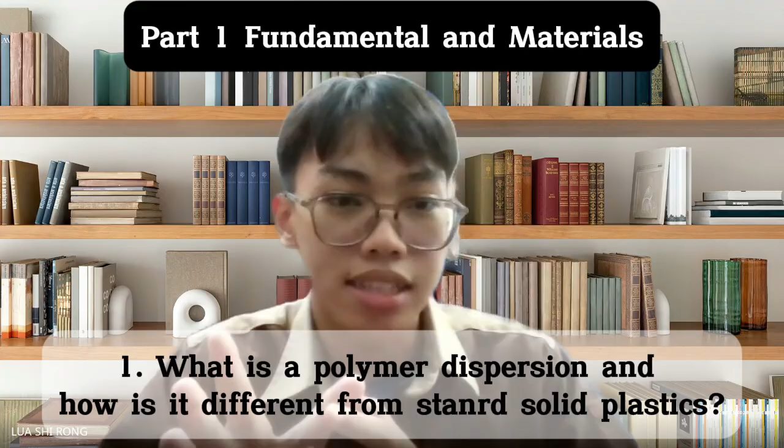So now we're going to begin with the first part of the questions, fundamentals and materials. First, what is a polymer dispersion and how is it different from standard solid plastics? And second, how do you ensure that the raw materials from your suppliers are always of consistent quality?

Okay, part one, fundamentals and materials. We talk about polymer dispersion and conventional plastics. Conventional plastic is normally more robust and harder compared to polymer dispersion. Polymer dispersion is normally in liquid form. I'm not an expert on conventional plastic because I'm not in that industry, but chemistry-wise it's similar. The main raw materials for both conventional plastic and polymer dispersions are monomers.

The only thing is they make polymer dispersion as a liquid, and conventional plastic into pellet forms, bits and pellets. Polymer dispersion's main end users are in coatings: coatings for the paint industry and construction, your cement work, your sealant, and also adhesives like bonding agents. These use polymer dispersions, and also some very soft plastic linings.

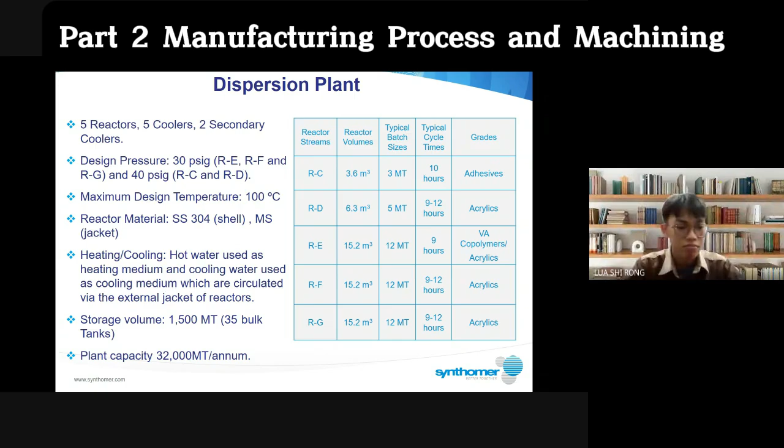So this process plant, polymer dispersion Kluang, we have 5 reactors. You can see here, okay, 5 reactors. Reactors is the main equipment to polymerize the polymer dispersion. We call them reactors. And the other 5 coolers and 2 secondary coolers are supporting tanks for the reactors. That means when you end the process in the reactor, you transfer to cooler to cool down, and add in some other raw materials before we can filter and move to storage.

Okay, these 5 reactors, we call them with alphabets from C to G. So you can see RE is reactor E, RF is reactor F. And here is reactor G, this is reactor C, and reactor D. So it's from C to G. Why C to G is because we used to have A and B, a very small reactor at a different location in Kluang, but there's no more. It's already decommissioned. So that's why the remaining is C to G, 5 reactors.

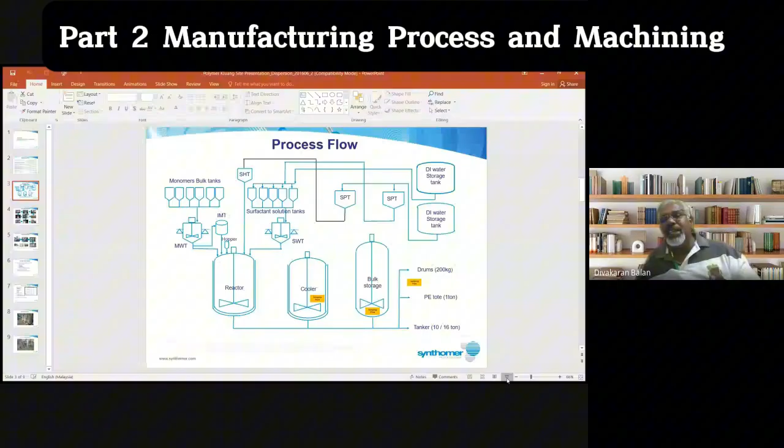Okay, so here reactor C, if you see the volume on the right side of the screen, reactor volume is 3.6 meter cube. So it's not big, it's a small reactor, 3,600 kg lah, about that, each time you process each batch. So typical batch is 3 metric ton. Normally this is the reactor volume, but the batch we produce is normally lesser than the reactor volume. Should be, if not it will overflow. So normally the formulation recipe given for each product is lesser than the reactor volume.

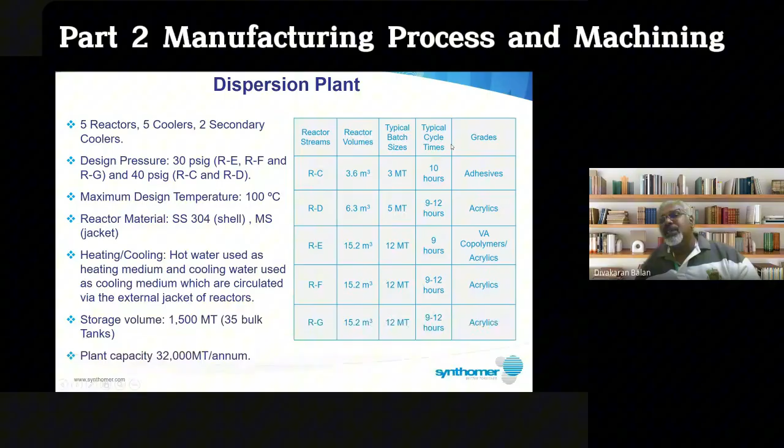And this is the cycle time per batch. Given here is typical cycle time. It can vary by product. Some product can take only 7 hours to produce, and some will go to 10 hours in this reactor C. And the product grade here means the product chemistry is adhesives lah. So adhesive is like bonding agent. You know, the glue, the woodwork, all these are adhesives. So this reactor, we only produce this type of product.

And then you go to reactor D, 6.3 meter cube, and each batch like 5 metric ton. And this is the cycle time, 9 to 12 hours. And the grade of product we produce is acrylics. So by chemistry, we have like 3 different types of products. One is acrylics, one is vinyl acetate, one is adhesive. And if you see VA copolymer, it means you use multiple monomers in this product. Normally acrylics is like a mixture of styrene monomer and butyl acrylate. If you see VA here, like the E, VA is vinyl acetate, VAM, vinyl acetate monomer.

Okay, and reactor F, reactor G. So reactor F, E, and G, the reactor size is similar. And typically the product we produce is like 12 metric ton, and the cycle time for each batch is 9 to 12 hours. And in fact, we got up to 15 hours also.

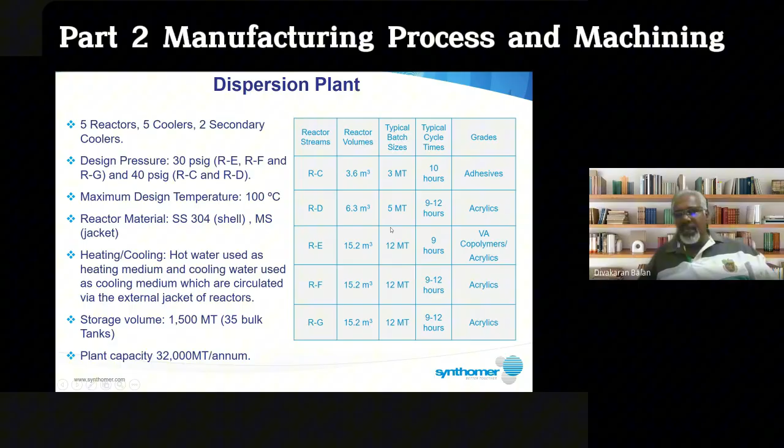So the shell is the internal, where you have the mixer. The material is stainless steel 304. And the jacket, the outer layer, will be carbon steel, mild steel. Because we just use water inside that, so that is a cheaper design lah. So inside is stainless steel, outside is mild steel, for all the reactors. So here if you see heating and cooling, hot water used as heating medium, but actually it's not hot water. It's actually water. We inject it with live steam, so it becomes hot water.

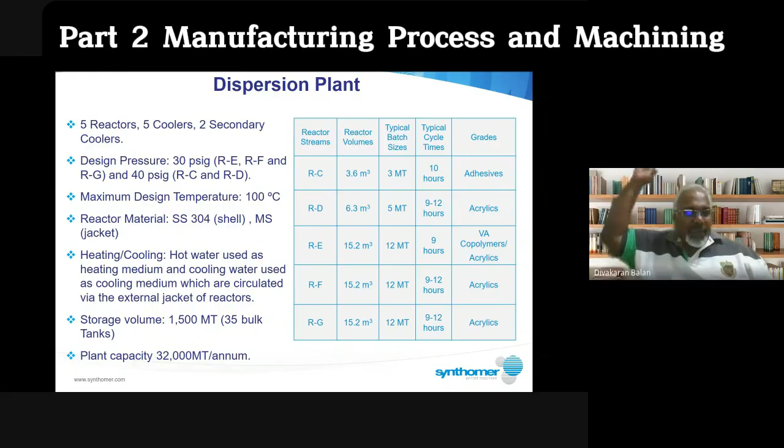Okay, and then cooling water is used as cooling medium, and this is not cooling water, it's just normal water, around 28 to 30, 31 degrees Celsius temperature. So that we use to cool down the reactor. Okay, and the cooling medium is circulated via the external jacket of reactors. So you have pumps which bring in the cold water, normal water, into the reactor jacket. It will circulate and go out back to the cooling tower. So that's how it flows.

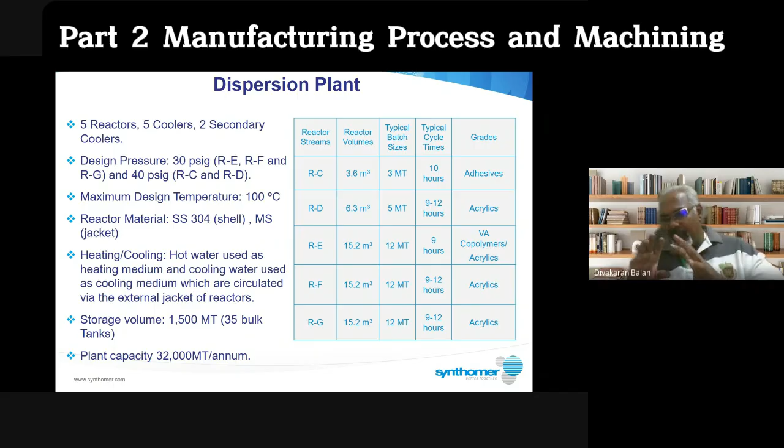And steam is the same. Once you inject it to the water, it will go to the jacket, it will heat up, and these reactors are controlled by DCS. Okay, each batch is controlled by DCS, whereby for individual grade products we already preset what temperature is required, what duration is required. All these are already preset inside. So each time the technician just needs to download what product he wants to run, he downloads the recipe, and the DCS will do its work. And the technician just needs to monitor each batch.

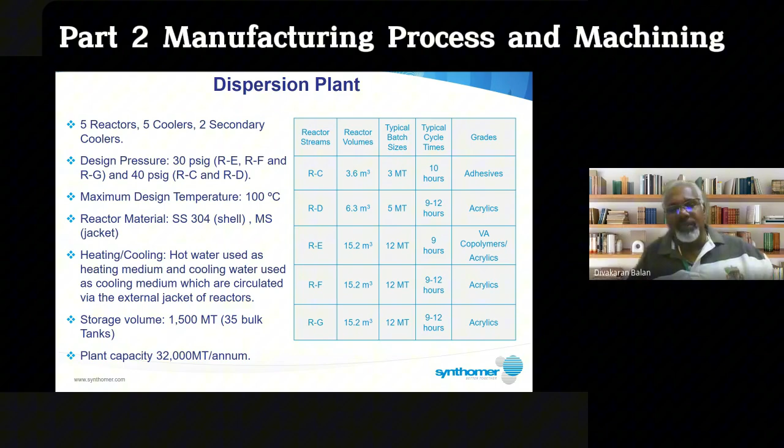Okay, this storage volume is for finished products. Okay, total we have 35 tanks, and the size varies from as small as 10 metric ton up to 60 metric ton. In total, we have 35 units. And this is the overall plant capacity for the year. It is 32,000. If you run full swing the whole year without any breakdown, you can get 32,000 metric ton.

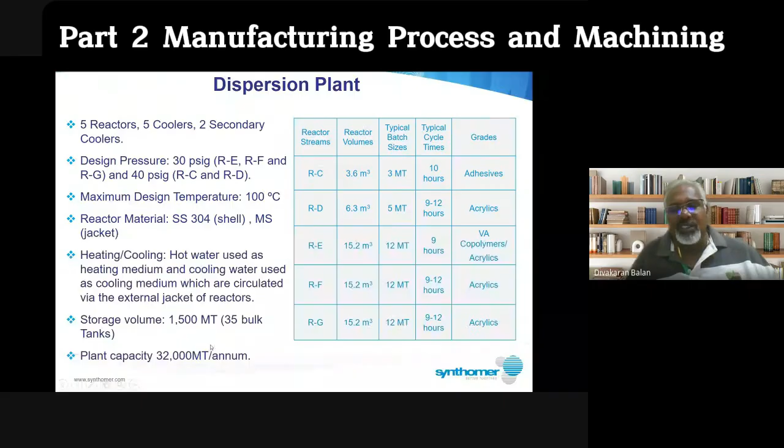Okay, we go into the process. As I said, all the 5 reactors just now will have a similar process flow like this. Okay, if you look at this from the left, monomer bulk tanks. So these are the monomers. Monomers will have separate storage tanks, and then when required, as I said just now, the technician will download what product he wants to make. We already have a schedule every day, so he will download that product recipe into the DCS. After that, this flow will start moving. The monomers will charge into here, MWT. MWT is monomer weighing tank.

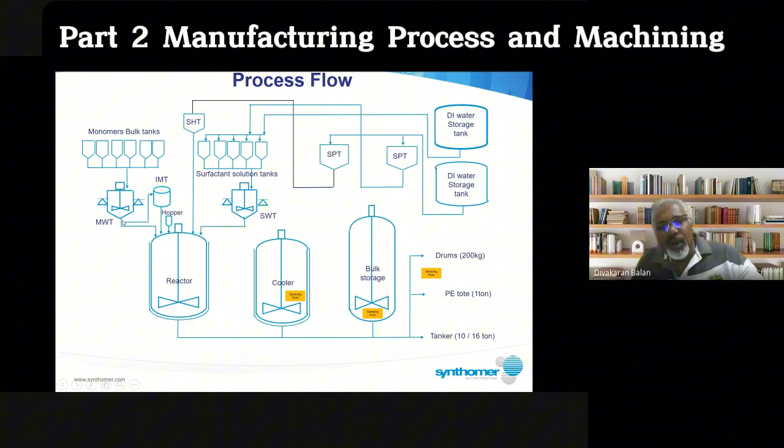At batch start, the monomer will transfer from the storage tank into MWT, monomer weighing tank, and partially from the monomer weighing tank, about 5% to 10%, it will transfer into the initial monomer tank. So what initial monomer is: when the reactor starts polymerization, an exothermic reaction we call it, it needs some monomer to react with the initiator, with the catalyst. So we have monomers, we have surfactant here, and we have initiator catalyst. Normally these catalysts come in powder form, so we add it direct to the reactor through this hopper.

So we charge in the initial 5% of the total monomer. Normally the total monomer is around 5 to 6 metric ton. The batch is 12 metric ton. So your 5 to 6 metric ton will be monomer, and maybe 3, 4 metric ton will be water. Apart from monomer, water is another main raw material for polymer dispersion. So you must have water, monomer, surfactant, stabilizers, and initiators, catalysts. You mix all these, only then it will become polymer dispersion.

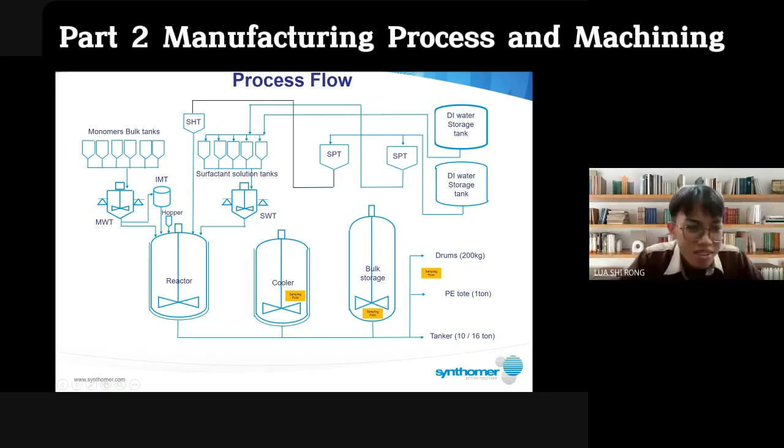Okay, so far clear about the process? Very clear. So these are some pictures I want to show you. So look alive a bit when I show some pictures.

So this is the SPT I was just talking about, this SPT2 here. These are pre-weighing, where the raw material comes in big packaging, but each batch uses a small amount of raw material. So we have to pre-weigh, that means we have to weigh out 2 kilo. That is done manually, so that's what we put here, pre-weigh.

And this is the SST I told you about. On the far right, the holding tank is the SST. On the diagram just now, SST, you have about 16 units. And some of the initiators I told you are put in the reactor chemical hopper look like this. We have to weigh out solid chemicals, so the operator has to weigh them out manually.

And then the technician has the reactor. You see, this is one of the reactors. We have 5. And this is the weigh tank. And this is the monomer storage, on the bottom here, the monomer tank.

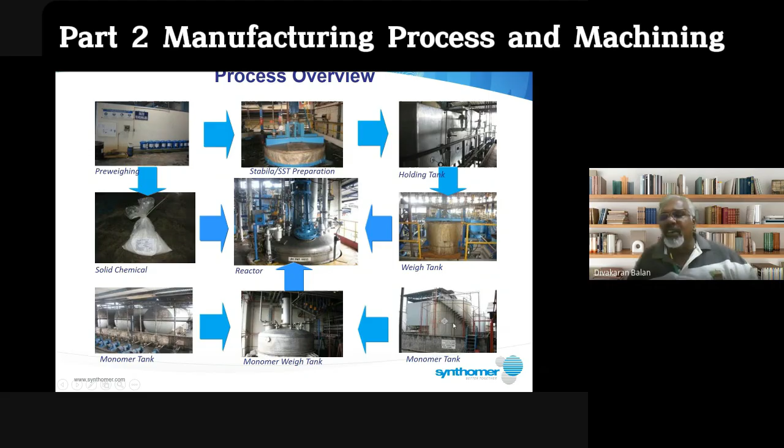These are partially, not all. Some monomer storage is on your right here. These are the big tanks. On the far left is a smaller tank of 20 metric tons, and the right one is like 300 and 500 metric tons.

And this is the cooler. This cooler tank is not a process vessel, it's just a holding vessel. And then this is the filtration we do. After the cooling tank, before going to the storage tank, on your far right, we have to do a filtration in the middle here. We filter and transfer the product into the storage tank.

This is a filter on your right bottom, the GAF filter. We put filter bags inside this. The filter bags come in different sizes: 80 mesh, 150 mesh, 300 mesh. This depends on the quality testing; they will advise how bad it is, because this finished product emulsion normally has grit inside, some unreacted chemicals. These unreacted chemicals we have to filter out before packaging.

The packaging will be in these drums. This is a 1 ton, 1000 kg container, we call it an IBC container, and on the far left is the road tanker. Normally products going overseas go in IBC or drum. The local ones, mainly for coatings, go in road tanker.

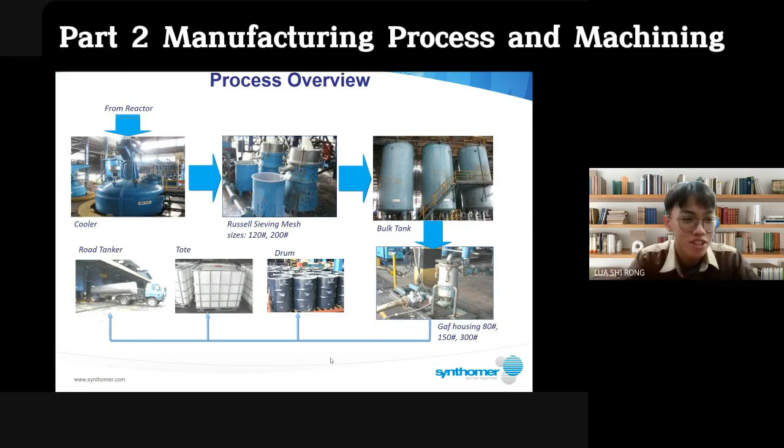Okay, did I answer your question 3? Yes, you definitely did, sir. The whole process is so long and continuous, but you explained it in a very structured way and made it very interesting. Now we're going to move on to question 4 and question 5, and I'm going to pass it to my pal.

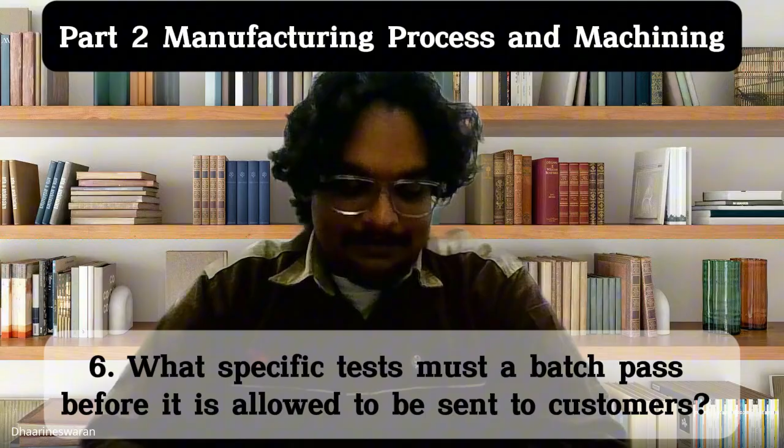I'll ask two questions. The first question is, what is the biggest challenge when moving a new product from the lab to mass production? And what specific test must a batch pass before it is allowed to be sent to customers?

Okay, I think you have missed out question 4: most critical piece of machinery. From what I explained to you just now, the most critical piece of machinery will be the reactors itself. Without the reactor, there's no business. So the simple way to answer that question, the reactors are the most critical lah. Of course, for the reactor to process well, you have to have good maintenance, good schedule, and so on. But according to your question, I will say the most critical machinery is the reactor itself.

Okay, and question 5 you were asking is what is the biggest challenge? New product. Yeah, definitely, as you say, it's a very big challenge lah. Because until now, we still have issues when moving new products. Because this is a global company, normally the new product is not a newly developed product only. The new product in Kluang can be already produced in another site before this. So when it comes to Kluang, it will be new to us. Just because the reactor setup might be slightly different, we will have issues with cooling efficiency, heating efficiency, heat removal.